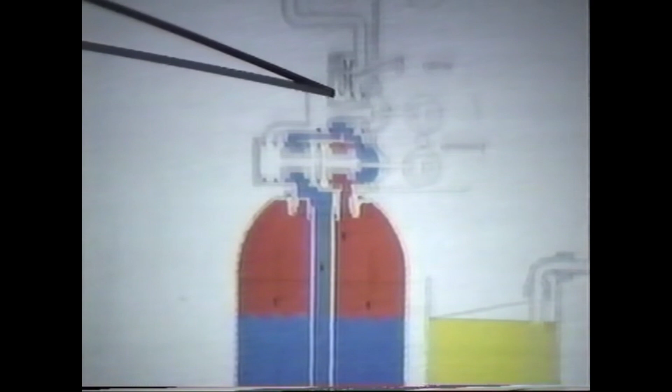What we're showing here is the service position, in which the top piston is drawn the furthest out towards the front of the unit. Here we're showing the conditioned water in blue and the raw water in red.

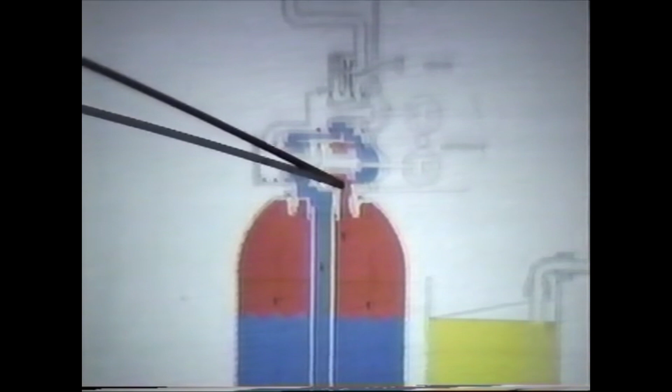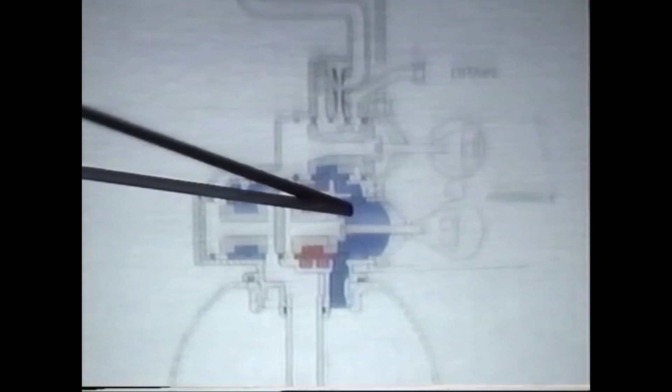In this position or cycle, what we're showing is the tank switching. The meter has zeroed out and initiated a regeneration, and remembering the first thing that happens in the operation is the tank switch. In the original photograph, this lower piston assembly was out one more rubber seal, causing the other tank to be on stream. Now that we've initiated a regeneration, we've pushed that piston in a little bit further, we've switched tanks, noting nothing has really happened yet to the top piston.

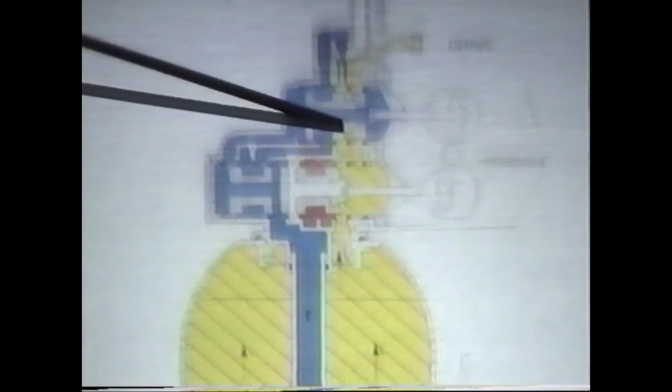Once the lower piston has traveled and switched tanks, the top piston moves into the backwash position. The movement is pushed towards the rear of the control valve a slight distance, then stops and is timed out on the timer assembly. You'll notice that the backwash water used comes from the second tank, and this blue or conditioned water is pushed down the distributor and pushes up any accumulation from the last regeneration on the tank being regenerated.

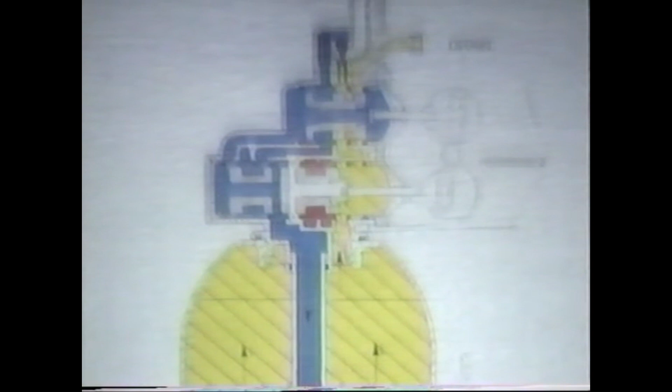After the time sequence of backwash comes off the timer, we shift into the brine draw cycle. The top piston moves a little bit further back towards the rear of the control valve, and now we open up our brine valve. With the piston in this position and the brine valve open, we draw brine in.

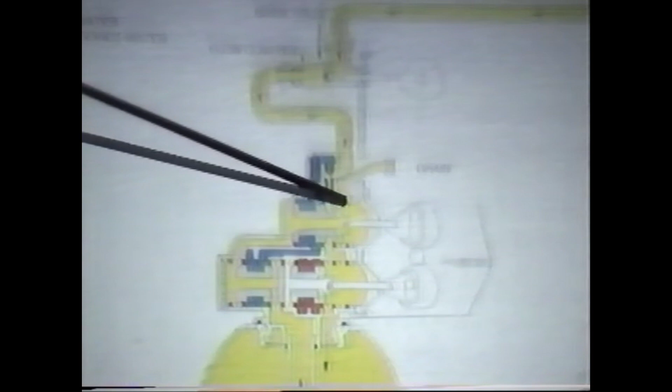The water feeding our injector assembly right here on top is conditioned water. So going through that injector screen and nozzle is soft water in combination with salt brine solution, going in then to the top of the tank to regenerate.

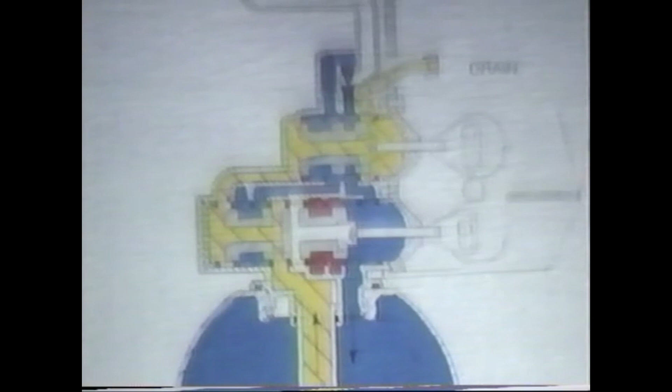Once we've drawn all the brine solution out of the brine tank, the air check in the brine tank checks off, and then we just pass conditioned water to slowly rinse out that brine solution, noting that the top piston has not moved, and the bottom piston still remains in the tank switch position.

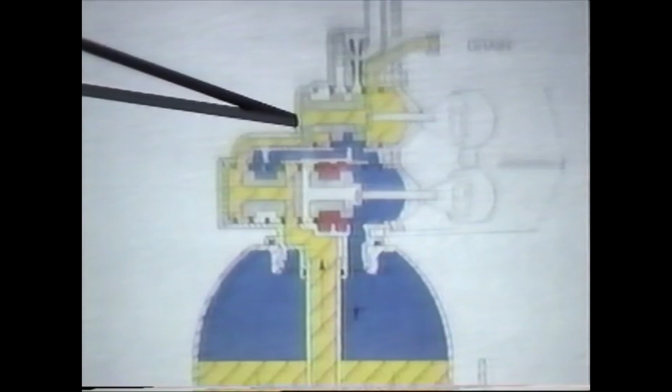As we complete the brining and slow rinse cycle, the top piston shifts again a little bit further all the way to the rear of the control. In this position, the brine valve is shut off and we're in our rapid rinse position.

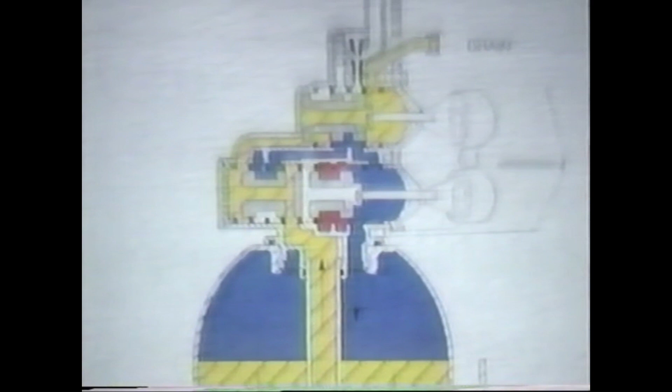Rapid rinse on the control is a downflow purge. We're pushing water through the system like it would be in a service condition, but we're drawing conditioned water off that other tank. That cycle can usually be shortened quite a bit, seeing that we're supplying the downflow rapid rinse with conditioned water. The primary purpose is, many times if you have any kind of salt pockets or salt water left after the brining and slow rinse, the rapid rinse would flush the system out.

After the rapid rinse cycle, the top piston starts being pulled back towards the front of the control valve, back to the service position. You'll notice that all the flow at the drain is stopped, and now we're refilling the brine tank with conditioned water off the other unit. Again, that lower piston remains stationary throughout the entire regeneration cycle.